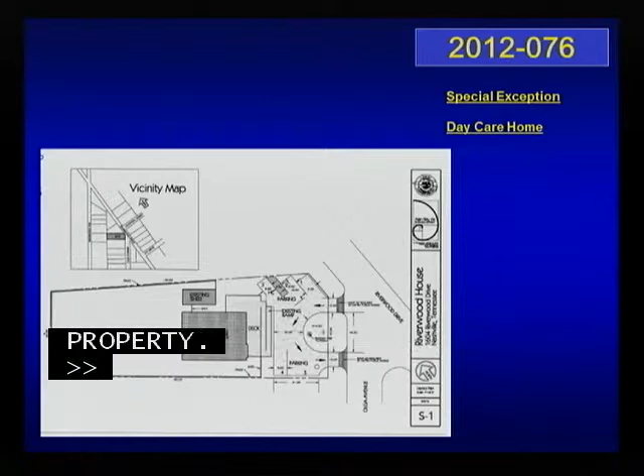Aerial photographs of the property and the site plan submitted by the applicant at the original hearing. These are photographs from the original hearing, as well as from my visit to the site, looking into the subject property to the adjoining properties on either side and the play area to the rear.

That's the case records, we have it. I'm going to step out and turn over to you, Councilman. And you are, again, not subject to that time constraint over there to your right. So this will, okay, great.

Thank you, Mr. Chair, or Chairman, and staff as well. Appreciate it. Thanks for having us back. And you should have a letter from me, hopefully, from the council office. Okay, great. Basically, I wanted to kind of go over that.

And I was going to ask him to pull up one particular photo, but that's okay. Please reference your letter, and if you can pull up a photo, I was going to do the front of the house photo. That's the one I was looking for. So thanks again. We had a great meeting on October 17th, one of those classic neighborhood meetings of everyone coming together, getting our thoughts out, and just trying to come up with some kind of solution for this.

Appreciate all the feedback from the last meeting where we were sort of understanding from you guys that the property owner has certain rights, and we wanted to meet with the opposition and sort of come up with what is it that they need to see on the property to make this a workable solution. So we met on the 17th, and I just kind of wanted to go over each individual point with you.

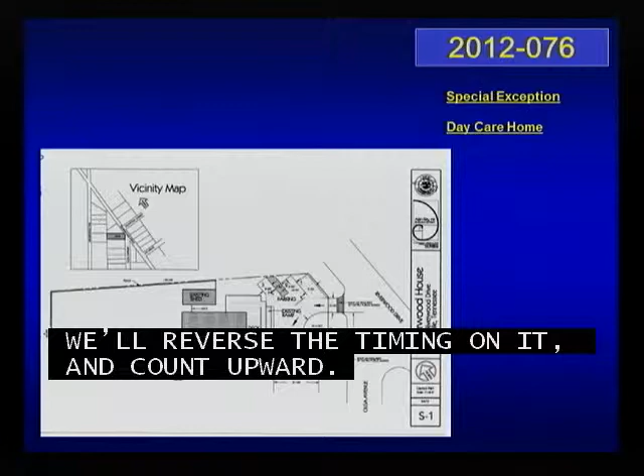The zoning administrator wanted me to point out parking. As you see here, we do allow stacking or double parking on a daycare home use. The idea of the principal use is residence, you can stack cars behind each other on that, so they don't have to be in a traditional parking layout like you see out front.

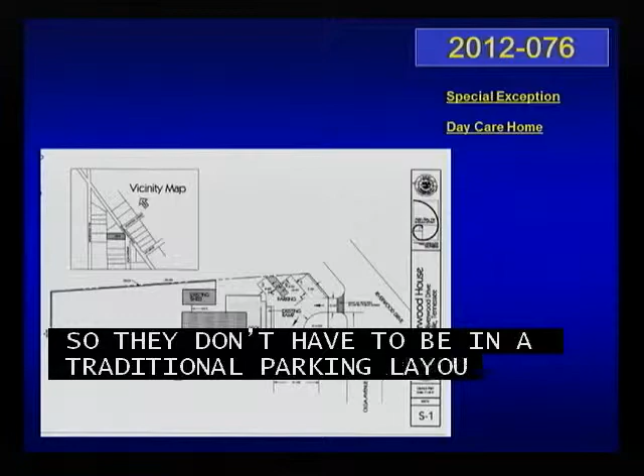I move that we give the appellant 3 minutes for rebuttal time if she'd like, and the same thing back for the, let's just do that. I second that. Okay, got a motion, got a second. All in favor? Aye. Any opposed? None. Passes.

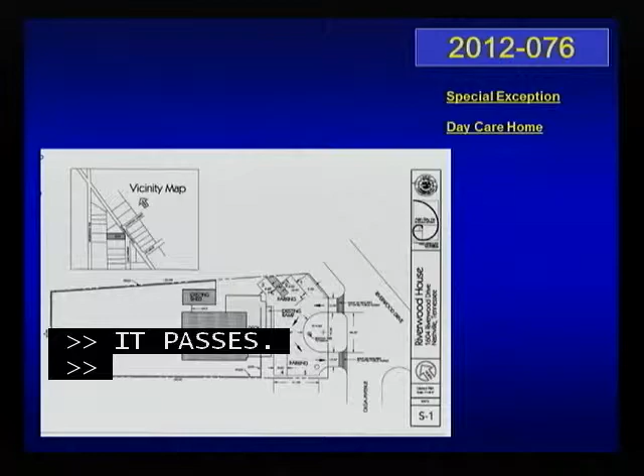If you're answering a question, that doesn't go against your time. Oh, so okay, we're just giving you the 3 minutes. If you decide to have a soliloquy or something for 3 minutes. That's all. Thanks. So are you in agreement with these terms?

Well, I did write a letter to the board of a few things that I was not clear about, and it seems like what you have come up with is clear about the 8 children. I was confused about what does that entail, because when you go through DHS, they give you a specific number. So I wanted to be sure that in this compromise that it—

I'm going to be okay as a business. Not saying that 6 children wouldn't give me income, but 8, there's a difference there. So that all makes sense to me, that I can have 8 customers other than my children. Okay. And the parking, when you just explained it, it made sense.

I'm still confused about the parking on the street, because it seems like in the past I have been called in for a violation of parking on the street. So that's where I'm like, I don't know.

Well, I can help you. Parking is prohibited on the street, period. And so you need to tell your customers they can't do it. And if they do, you're the only person they can call, is what it comes down to. There was never anyone parking on the street. I'm not sure that's true.

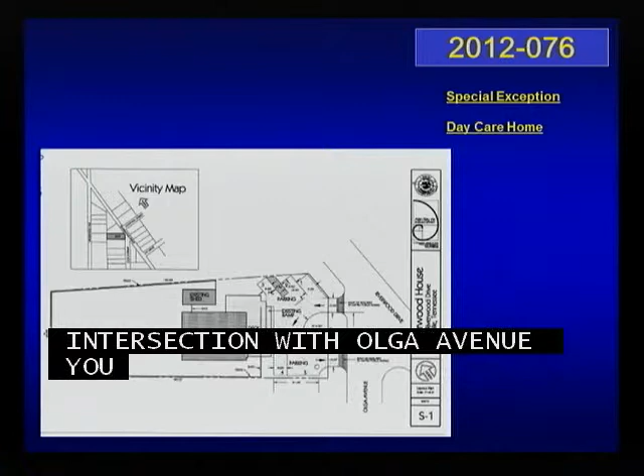Absent specific permission to park there, i.e. signs posted, you can't. As a practical matter, given that this is an unusually angled intersection with Olga Avenue, you shouldn't. And as a result, there may be some other actions the board can take, but those actions would not be able to include street parking as part of the solution.

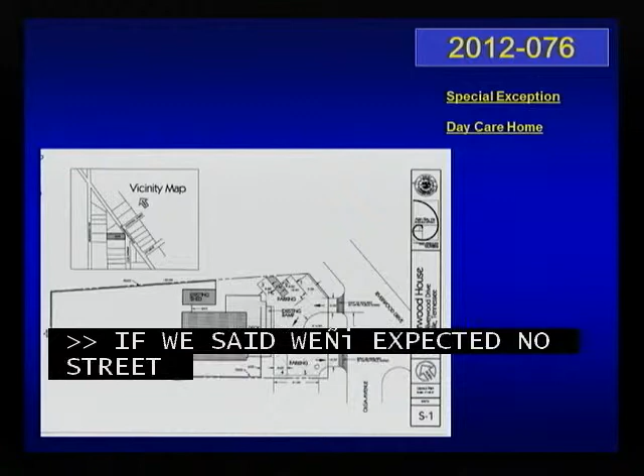Because I think if we said that we expected no street parking and they had evidence of lots of street parking, then that would be a reason for the neighbors to come back and say we'd like for you to review your variance request because they're not following your guidelines. Is that correct? I think potentially so.

And as the zoning administrator, Mr. Herbert, aptly noted, I think it's actually state law that would prohibit that type of parking and therefore trigger some of those concerns that Mr. Taylor notes. And it's actually in our requirements for daycare homes. So anyway.

So stacked parking can work in this situation too. So that all works out for me to stack, because we still haven't figured out—we have to get through this first to be able to figure out actually doing the turnaround and everything, and having the 3 parking spaces on that one side. And I guess taking away the 2 so they could stack in the turnaround, because that will keep flowing. And usually nobody parks anyway.

Well, and if I remember, there were multiple children for certain households and a few walked, so 5 should be plenty. And the shrubs, that was another question, because in the compromise letter it was the 4 sides, and I was confused on what that entailed—where am I going to have to put shrubs? So that was taken care of, that was cleared. So I'm in agreement with all of those compromises.

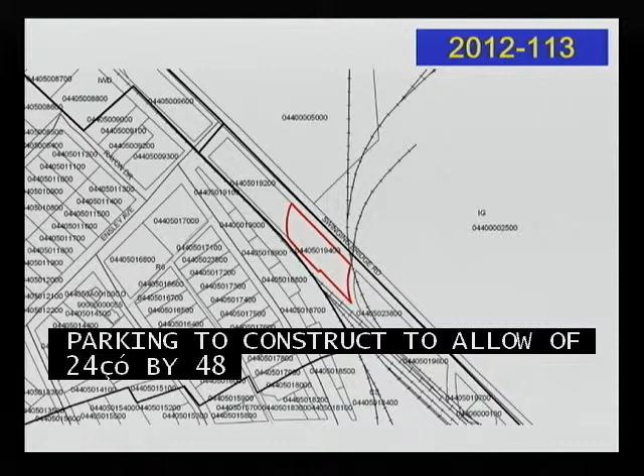Members, again, this case is before you on a parking variance. We have received a comment from Traffic and Parking; you have copies of that information they've sent over. The subject property is located in red, here in the CS zone district. To the immediate northeast is the DuPont factory and plant. The adjoining property is vacant. Railroad tracks separate this parcel from the parcels to the south.

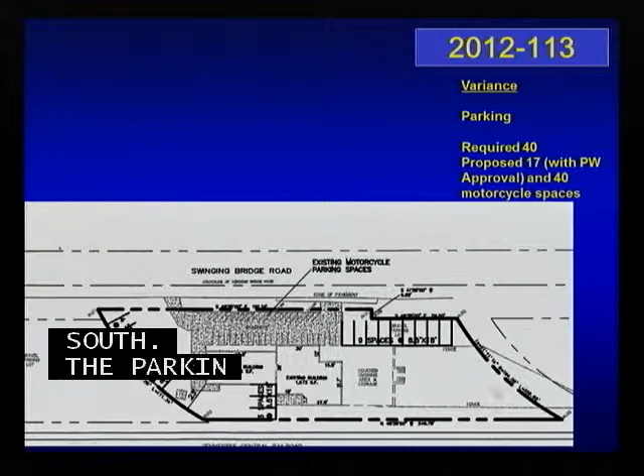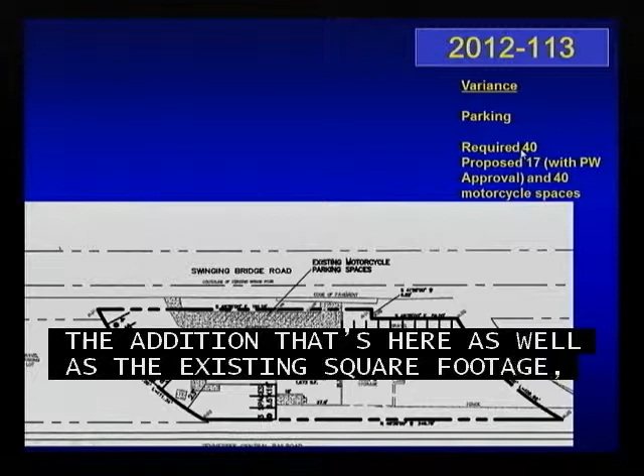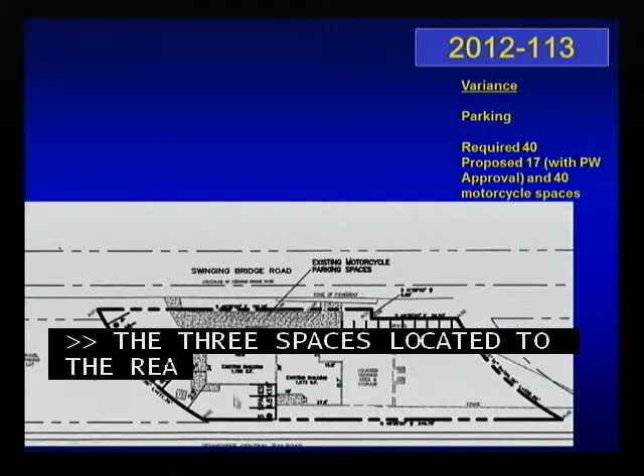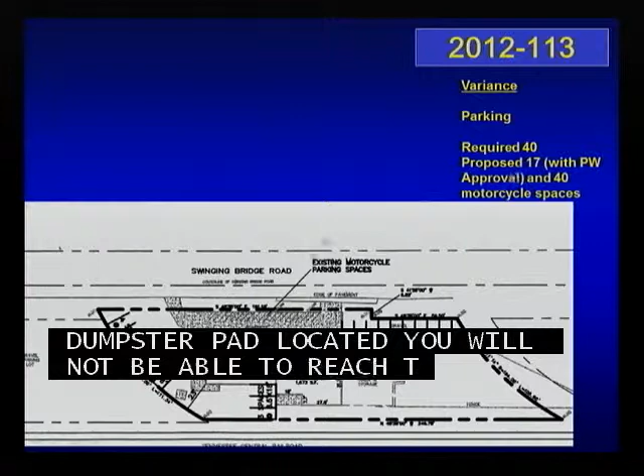The parking variance required is based upon the square footage of the addition, as well as the existing square footage and covered seating areas, which you see there. There are 40 parking spaces required of the applicant. Proposed on site that are usable — and I'll explain what I mean by that — the 3 spaces located to the rear are not able to be accessed. The 23 feet here, you'll see in the photographs a dumpster pad located; you just won't be able to reach these spaces. So the 17 number that I have here includes the 8 spaces along this radius, curvature, as well as the 9 spaces that are front loaded or head-end loaded off Swinging Bridge Road.

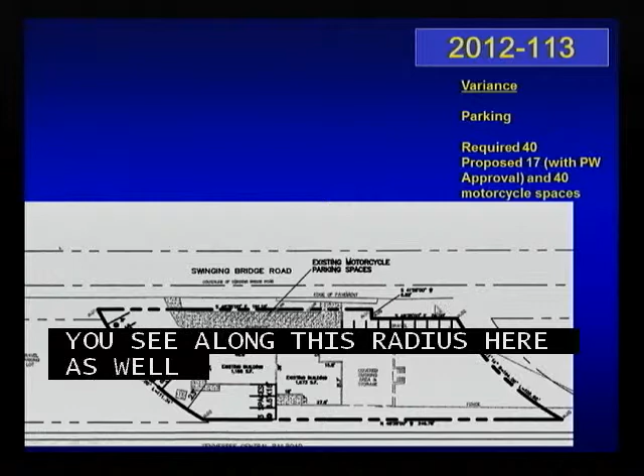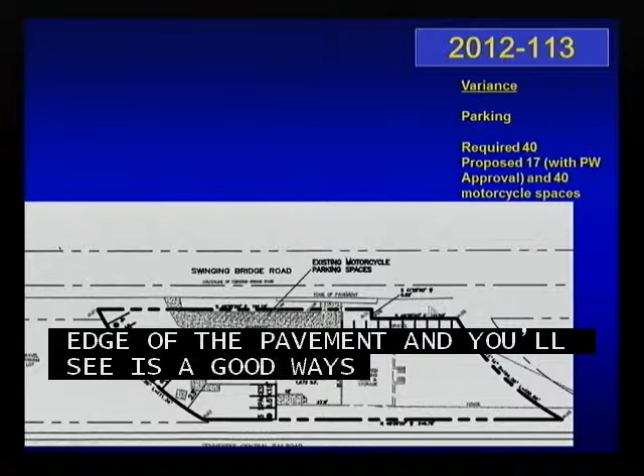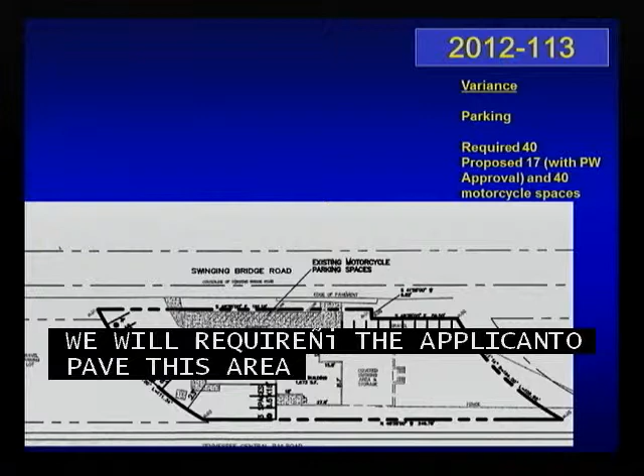The edge of the pavement, as you'll note in the photographs, is a pretty good ways from the back of where these cars are. This area here is a graveled area; we would require the applicant to pave and hard-surface this area for these 8 spaces. So 17 total with Public Works approval. Public Works, in their comments, I believe — hopefully Devin addressed with you the front pulling-in spaces.

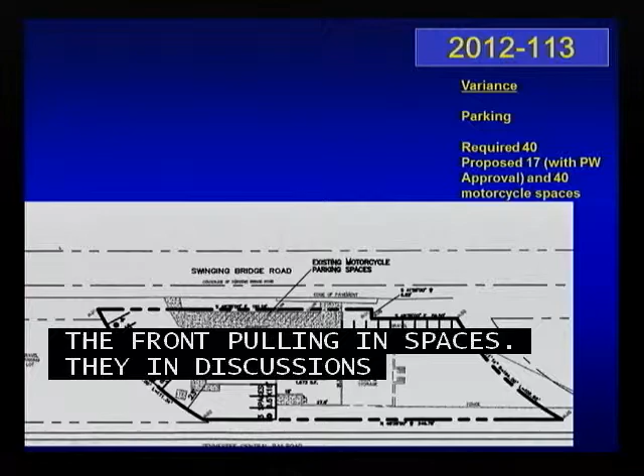They're going to discuss that with them on the permit side. My understanding is their initial indications to our office are that they'll be okay with these coming in, given the distance between where the cars end up parking and the actual pavement of the street. There's pretty good ways there.

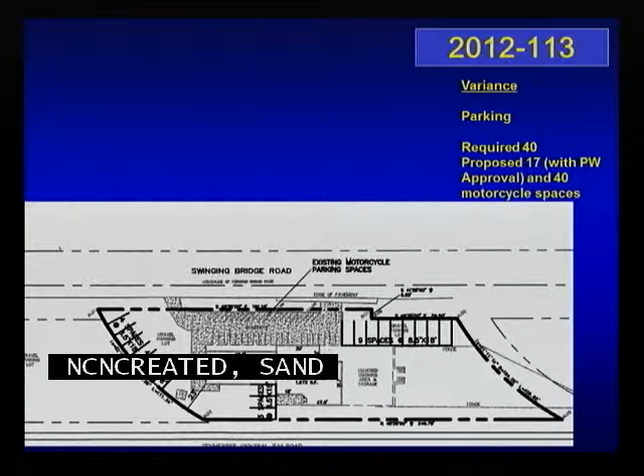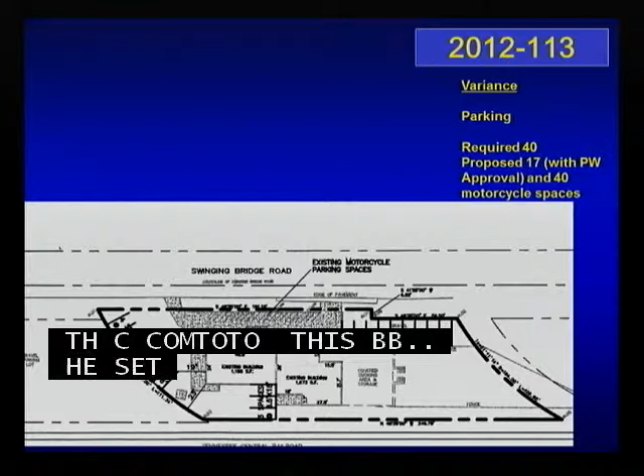The applicant is proposing this concreted area to have 40 spaces for motorcycle parking. The gentleman's clientele is generally bikers that come to this bar—they don't drive cars, they drive motorcycles—and he's set aside 40 spaces for his clients and visitors, which you'll see in the photographs too.

This is looking at the subject property from Swinging Bridge. The existing bar building is located here, with the covered seating area in this location. Those were existing. This is the addition that's been erected on the property and triggered the need for parking. The concrete area in front of the building is striped with angled parking, 90-degree parking for motorcycles. Again, this is looking back toward the railroad tracks.

The 9 spaces I talked about on the site plan are on the other side of this fence, in this area. As cars pull in off Swinging Bridge Road and up to this fence area, the retaining wall, and the gate, there's significant enough room from the back of the parked cars to the actual pavement of Swinging Bridge Road. But Public Works will talk with them about what they may want them to do—maybe angle those parking spaces rather than 90 degrees.

This area appeared to me on my visit to have been recently graveled, perhaps re-graveled from prior. We will require them to surface this lot as well as this one. This is the radius area I was talking about, the 8 spaces, Joy, to the right of the site.

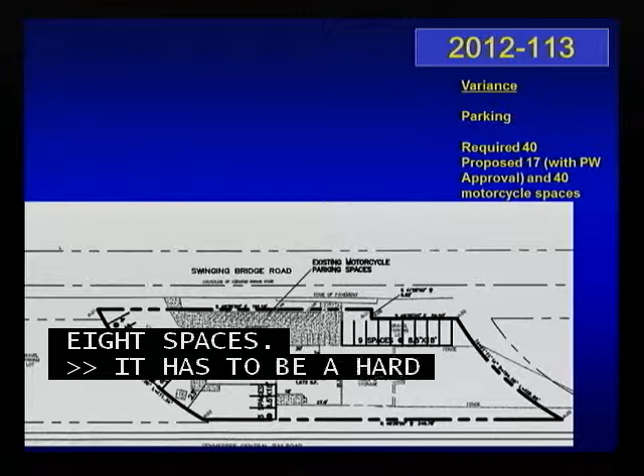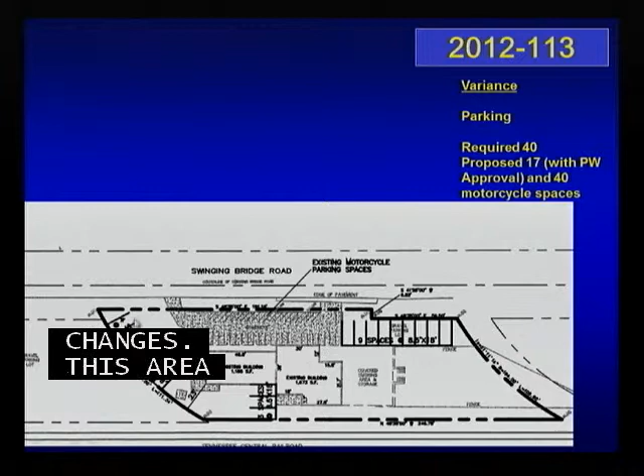It has to be a hard surface? Yes. This area especially—looking at the aerial photographs, we go back in time to see what's out there and whether there've been any substantial changes. This area, which I'm noting by moving the cursor on the site plan, has been recently gravelled. This has not been here before. There may have been a small patch here or there, but older aerials show this was mostly grass. So this area needs to be surfaced.

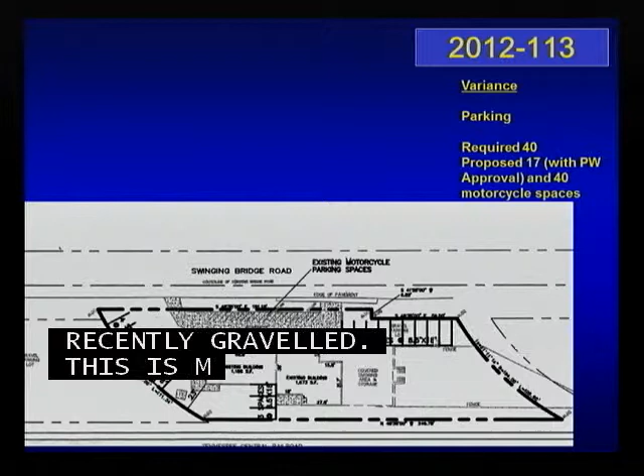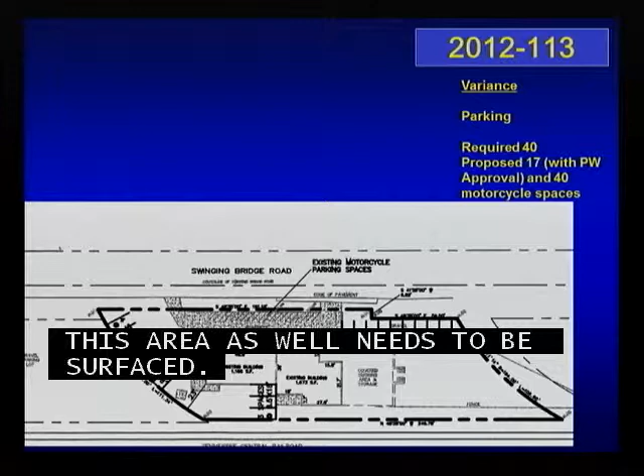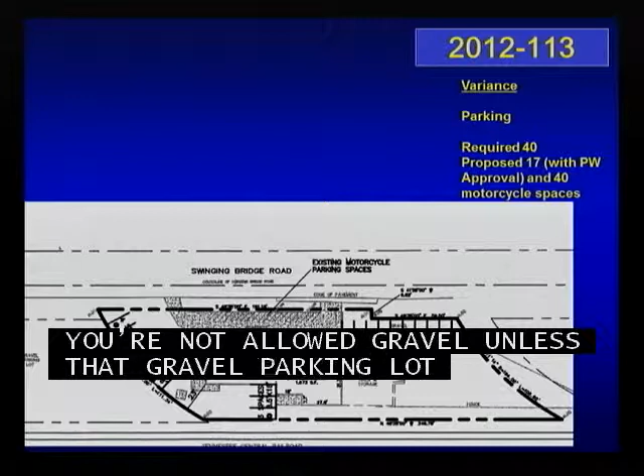This area as well needs to be surfaced. There was some gravel out here, but it doesn't appear old enough—it would have to go back to 1974 to be grandfathered for gravel, and none of the aerials I have go back that far show those two areas as gravel. So you're allowed no gravel parking? You're essentially not allowed gravel for changes of use or new uses, unless that gravel parking lot existed prior to Christmas Eve of 1974, in which case it would be grandfathered. Okay, so these areas would be brought up to compliance with hard surface parking.

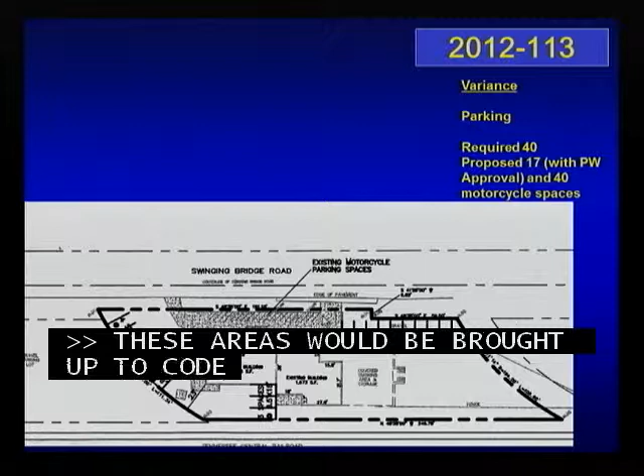This area here is already concreted. That has been that way, it appears, for some time—maybe recently touched up there.

And then views of this, the back of the property. This was the area where perhaps 3 spaces would be located. As you can see, access to that area is going to be restricted—there's not enough width between the back corner of this structure and the actual property line stake to allow them to even access this area.

I want to ask about the RV while the applicant's with me—what's the situation there? Is someone residing in it? There appeared to be a power cord hooked up to it. Yeah, it was, but not now. Okay, good. I didn't see evidence anyone was living there, but it may have been being charged or something. We just want to be sure that does not occur. I'd noticed in our property records back in 2008 that a citation was issued to a prior owner, perhaps for living in an RV on the property.

That's really all we've got. Hopefully Public Works, you got their comments. I don't have them in front of me, I'm sorry, but I could address any of them. With that, I'll turn it over to the applicant.

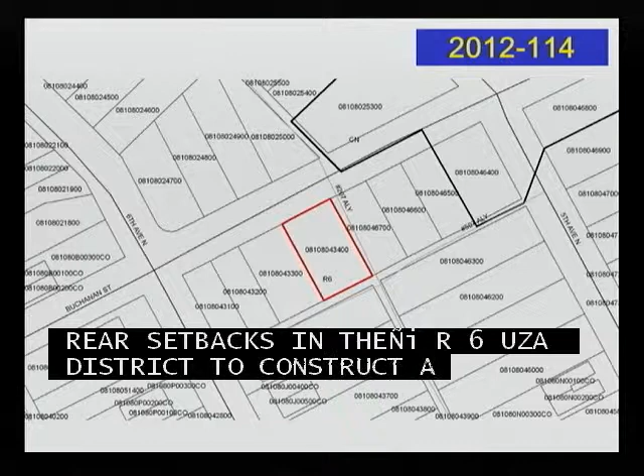Mr. Choate, the appellant, Alton Brooks Parker, is the owner of the property located at 511 Buchanan Street, requesting variances in street, side, and rear setbacks in R6 UZO to construct a proposed horizontal property line regime duplex with detached garages. Referred to the board under sections 17-12020A and 17-12030A. The applicant has alleged the board would have jurisdiction under section 1740-180, Item B. Is anyone here in opposition to the case?

No, Mr. Lubarsky is here in support. Sir, you have 10 minutes. Let me go through the slides for them. Mr. Choate's also turned in a PowerPoint presentation. I'll get that queued up for him. The subject property you see is located in the R6 district. It's the red parcel listed here.

This will be just east of Buchanan Street, between 5th and 6th Avenues North. The subject property includes the home that sits there today and the adjoining property.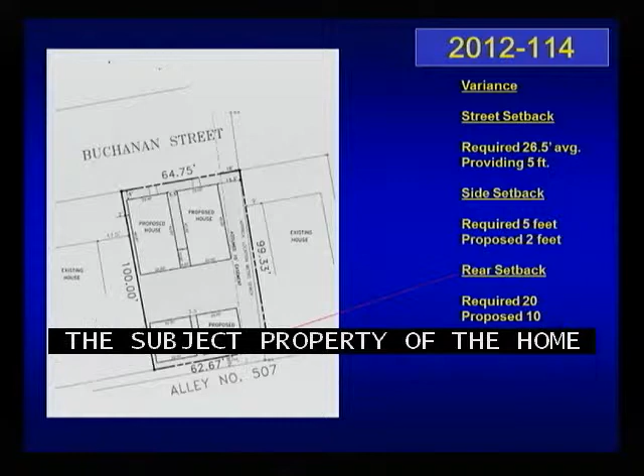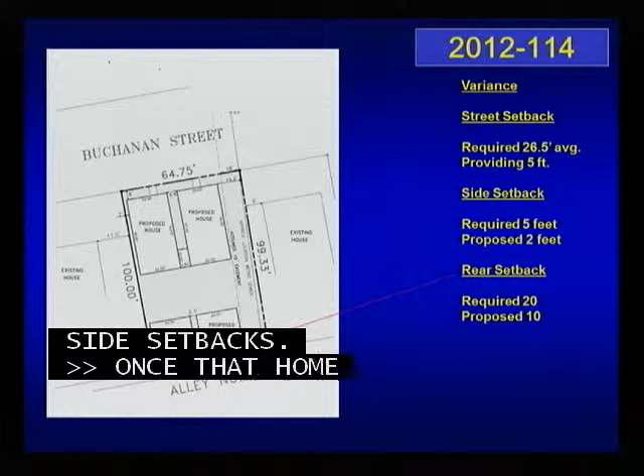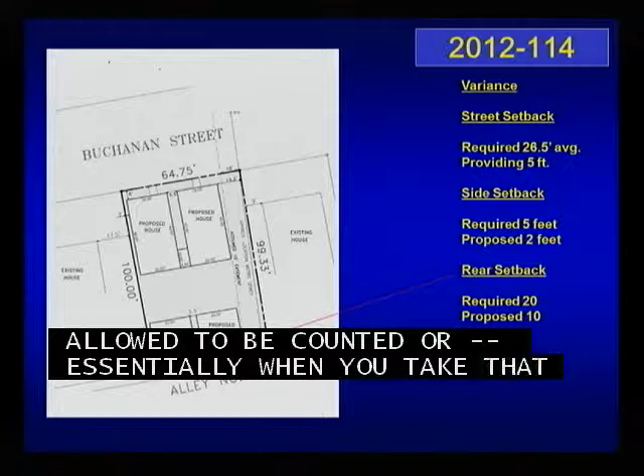This is the site plan submitted by the applicants requesting 3 variances. The first is a street setback variance, the minimum required setback for this structure. You'll see in the photographs the existing home that's on there. Once that home is demolished, it can't be counted, so when you rebuild a structure, you have to conform with today's front setbacks, which we've figured to be approximately 26.5 feet based on the adjoining residences on either side. He's requesting a 5-foot setback off the street, so a variance of 21.5 feet.

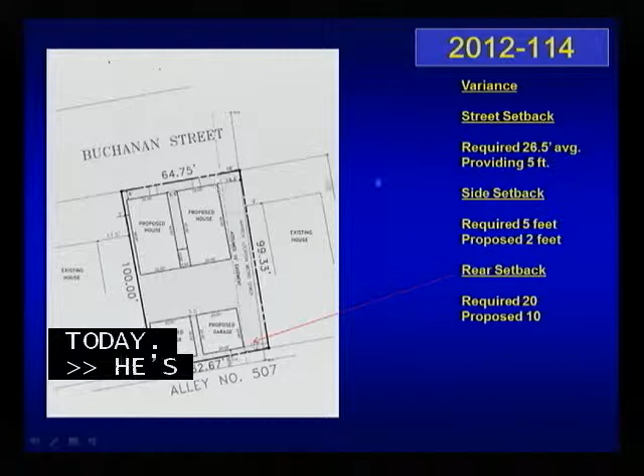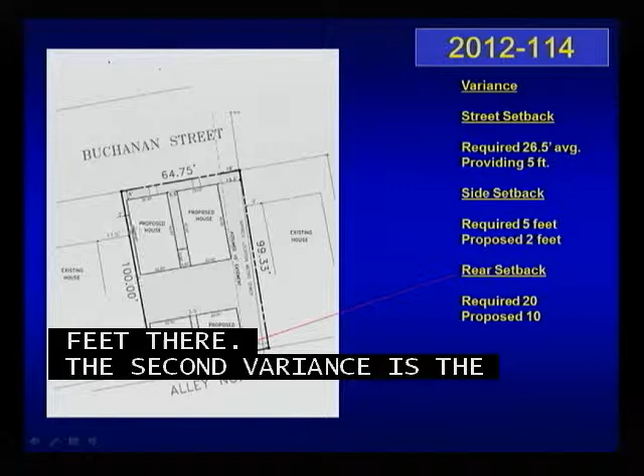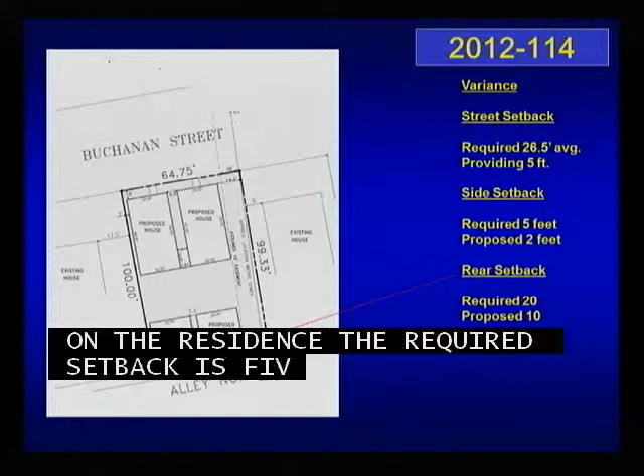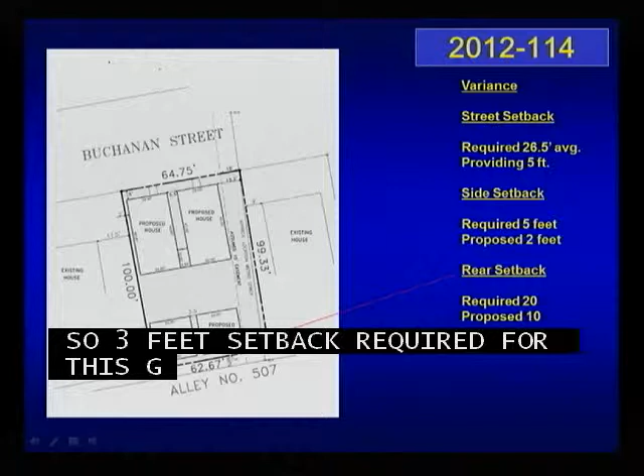The second variance is a side setback variance along the western property line, for both the residence and the detached garage. On the residence, the required setback is 5 feet, and he's proposing 2. For the detached garage, based on its size, the required setback is also 5 feet, with 2 requested, so again a 3-foot variance for that garage. Because there are 2 garages here as detached structures, the code only allows a single structure to be granted a reduced setback on both side and rear setbacks.

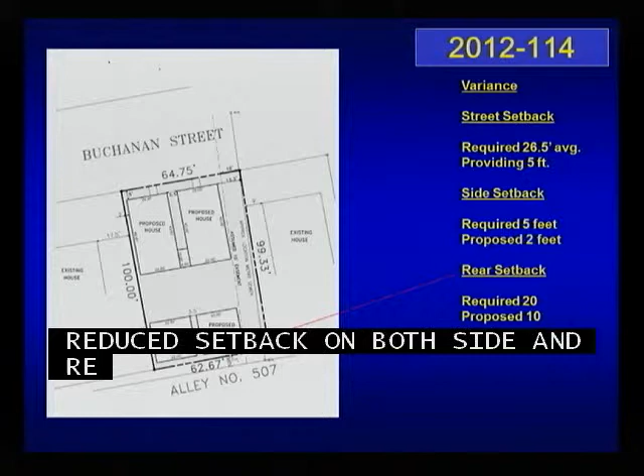Meaning one of these 2 garages has to sit 20 feet off the alley. In this case, we're listing this garage as the one needing to be 20 feet off the rear. The other does conform to the side setbacks because there's a 10-foot easement along the eastern property line. So there's a rear setback requirement of 20 feet on this structure and 10 feet on this structure.

And then the rear setback you're proposing, Mr. Cho — these are rear-loaded garages coming in from the alley? Yes, sir. So there will be a rear setback on both structures. Let me back up: this structure must be 20 feet, and this structure on the western side has to be 10 feet off the alleyway because it's rear-loaded. So you have a variance from 10 to 3 on this structure, and from 20 to 3 on this structure.

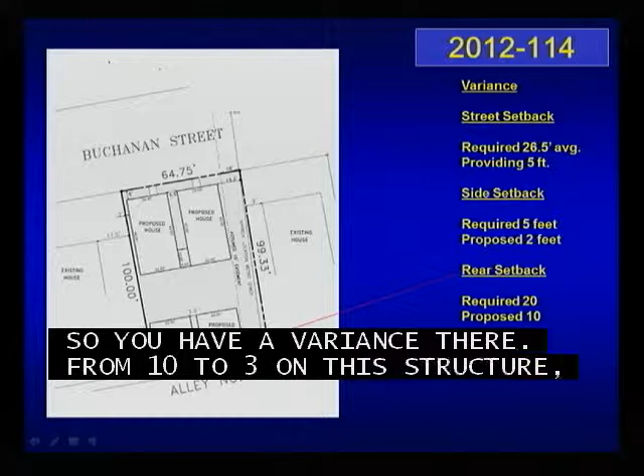So if they were connected and it was one garage, would it be too big? One garage would be over 700 square feet and would need to be 20 feet in total off the rear property line based on that size.

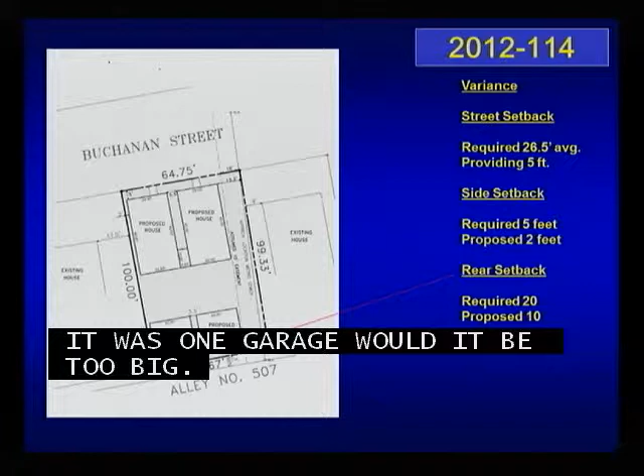So detached structures under 700 square feet can get setback reductions. On garages, depending on where the garage door faces — if it faces internally or faces a side property line, it can sit 3 feet off the alley. If the garage doors face the alley, it's got to be 10 feet. Any structure over 700 square feet has to meet full setbacks for the zone district: 5 feet side, 20 feet off the rear.

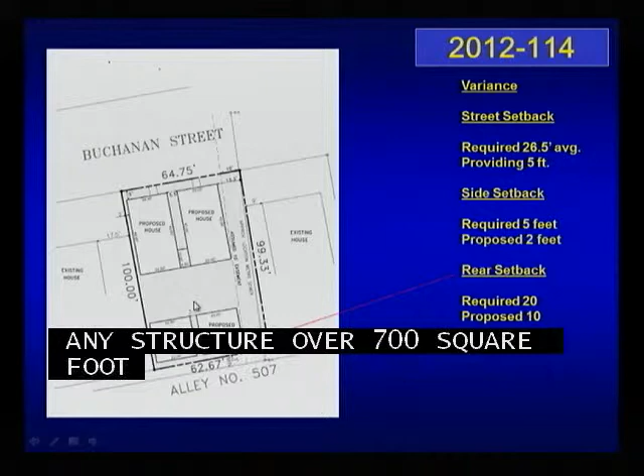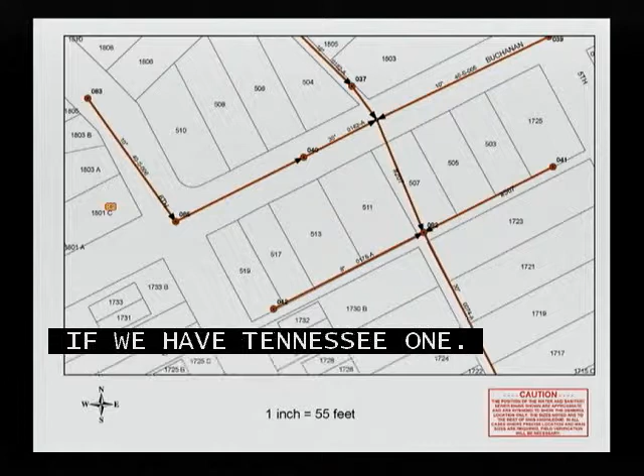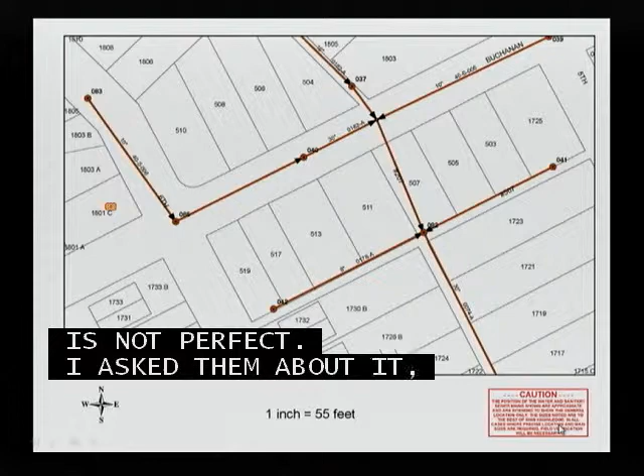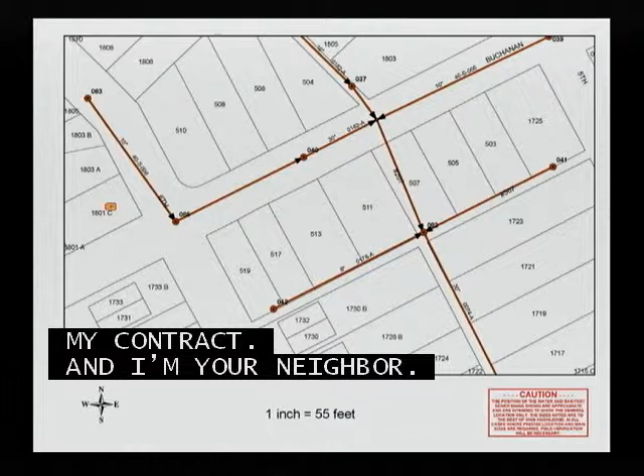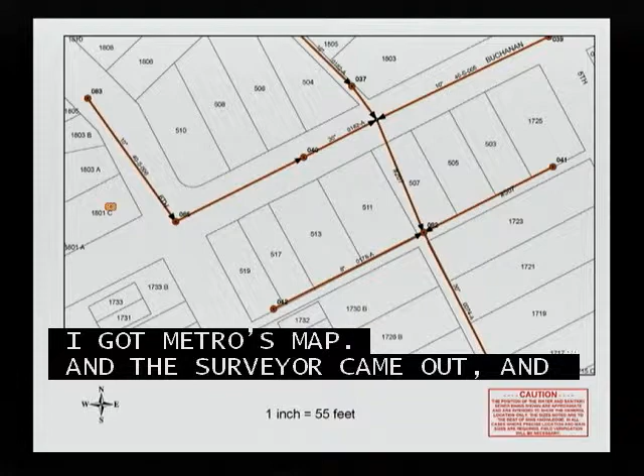They give you a warning at the bottom saying this is not perfect. I asked them about it and they said yeah, they can be off a foot. Mr. Lebarsky, who's my neighbor over there, met me and my contractor out there when we were looking at building some houses, and he said, I'm an engineer and I'm your neighbor here, I want you to build the houses but you might need to look at that sewer line. I said, well, I've got Metro's map here. So I called the surveyor, and he came out there and said yeah, they're a little more off than a foot. They're about 15 feet off.

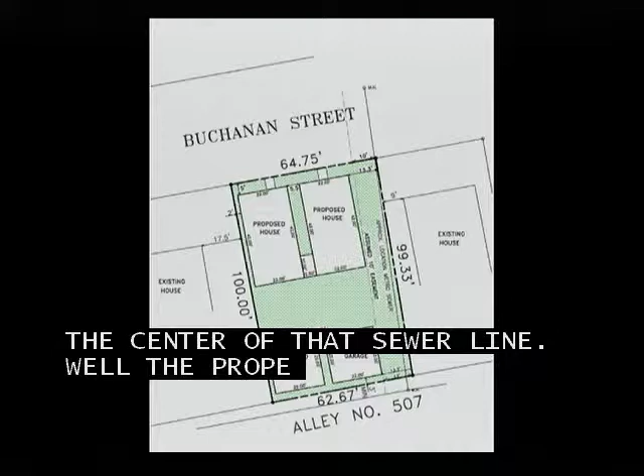If you go to the next slide, you'll see the sewer actually goes through the right-hand side of the property, and I have to stay 10 feet from the center of that sewer line. The property is already very shallow, so we're stuck in this situation, trying to figure out everything we can do to not really hurt ourselves since we've already purchased it.

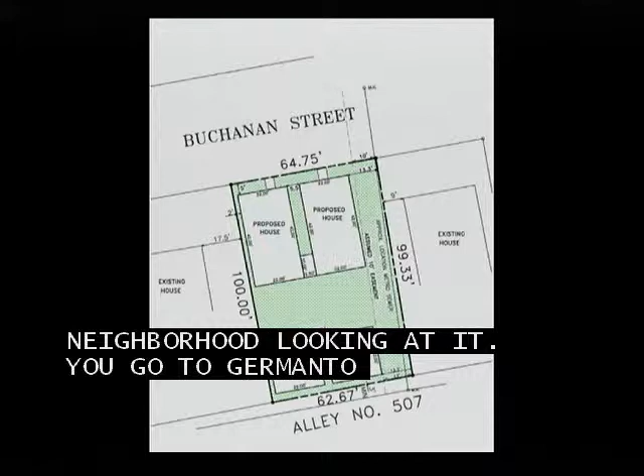So we started driving around the neighborhood looking at it, and you go over to Germantown Village or Germantown Station, and they have all these houses built to the curb. So we decided we'll build something to the curb, and ideally we'd like to build 1,700 square feet, a 3-bedroom, 2.5 bath with a 2-car garage. It's just impossible, so we've decided we'll go down to about 1,435 square feet.

We'd love to have a bedroom downstairs, but we can't do that—we're willing to move it upstairs. We're willing to build a lot smaller house. And if you look at the right-hand side where that sewer line comes through, there's no way of attaching a garage to the house back there. The garage just will not fit because we have to stay off the sewer line that we didn't even know existed.

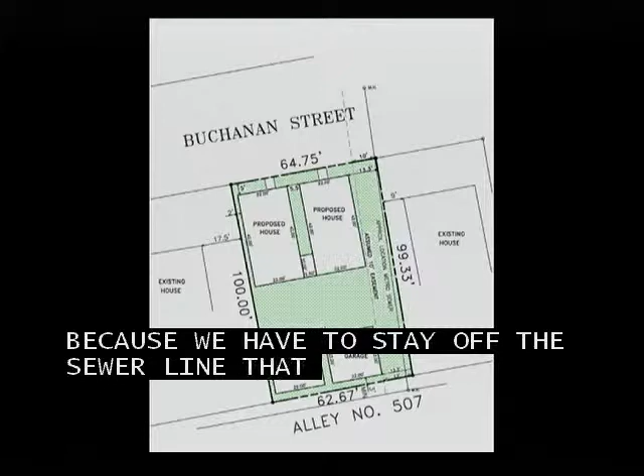The truth about the sewer line, it's not on public record anywhere. There is no easement anywhere. Title search—nothing pulled it up. It just was there. It was just a surprise.

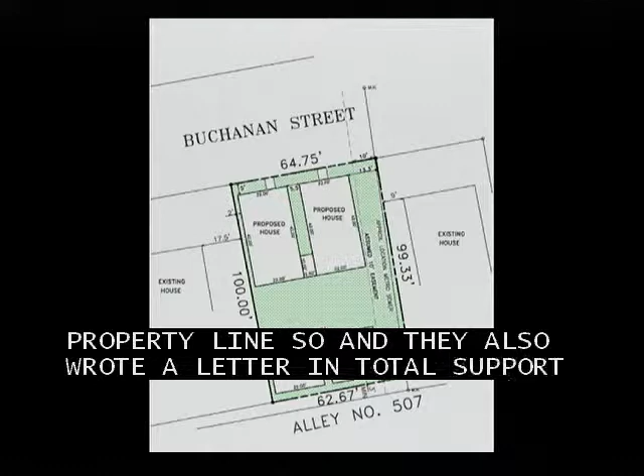Walking around the property, the neighbors to the left are 17.5 feet away from the property line, and they also wrote a letter in total support of it. Normally it would just be 10. Mr. Lebarsky's house is 13.3 feet to the right—no harm done there. The houses are 5 foot from the center. And I'll show you here in a second, the garages—yes, we're asking for 3 feet.

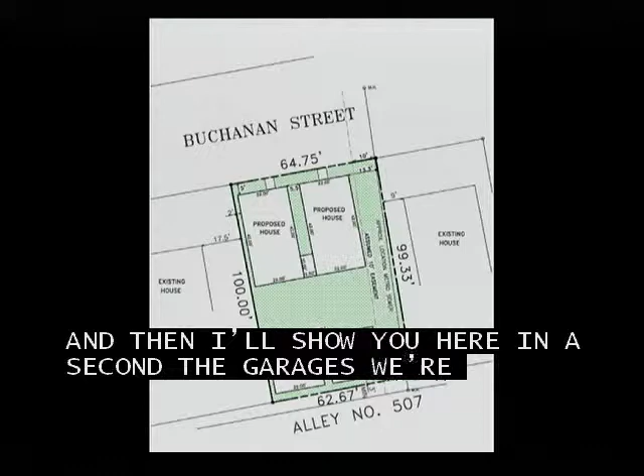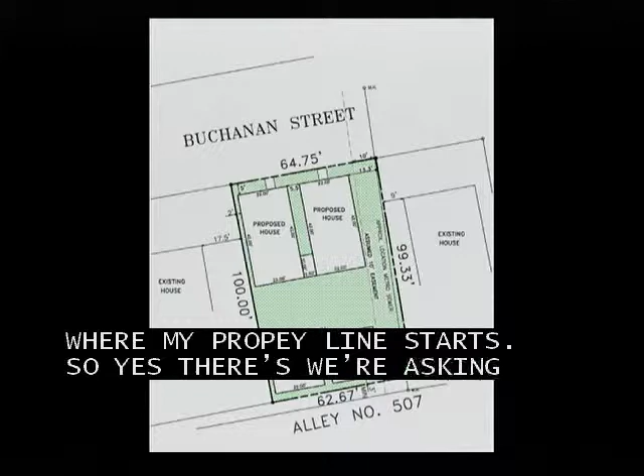But there's also 6 feet 10 inches and then 7 feet 10 inches of public right-of-way between the alley and where my property line starts. So yes, we're asking for 3, but there's going to be an additional 6, almost 7 feet there. So again, there is going to be 10 feet there.

Our goal here is to give the community a nice home, and we would like to have a backyard. I believe it's a hardship for a family not to have green grass in their backyard.